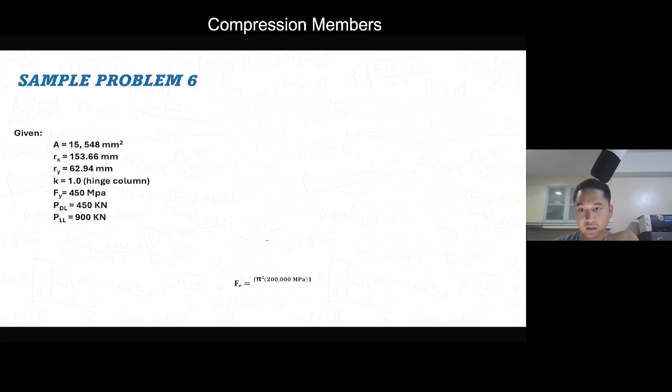So W14 natin yung properties niya. The question is, or the required is, find the maximum length L. So you must find that. How do we solve for that? So let's try. So first is the given. Yung column K is 1. PDL natin is 450. Then PLL natin is 900. Then length is question. So the first step is to assume.

Okay, diyan naman magaling mag-assume diba? Joke lang.

So you have to assume. It's either short column or long column. But for me, I prefer to assume long column. So, paano pag mali yung assumption mo? Di ulitin mo lang. So, better luck next time pag di mo nahulaan. So, for now, let's try to assume first. Then, we'll check it later. So, assume that this is a long column. So, SR is greater than CC.

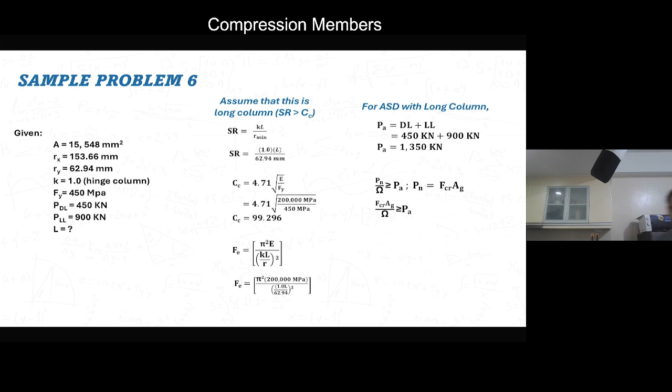So, wait a minute. Someone's calling lang. Wait. Okay, sorry for that.